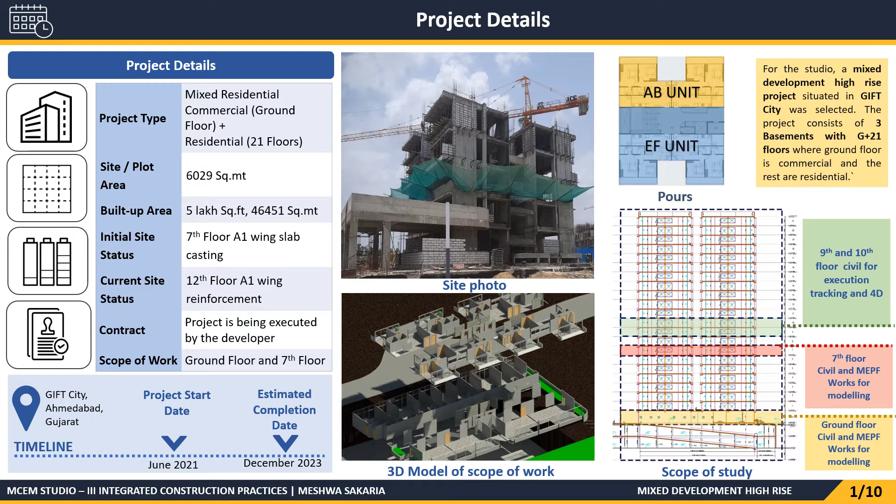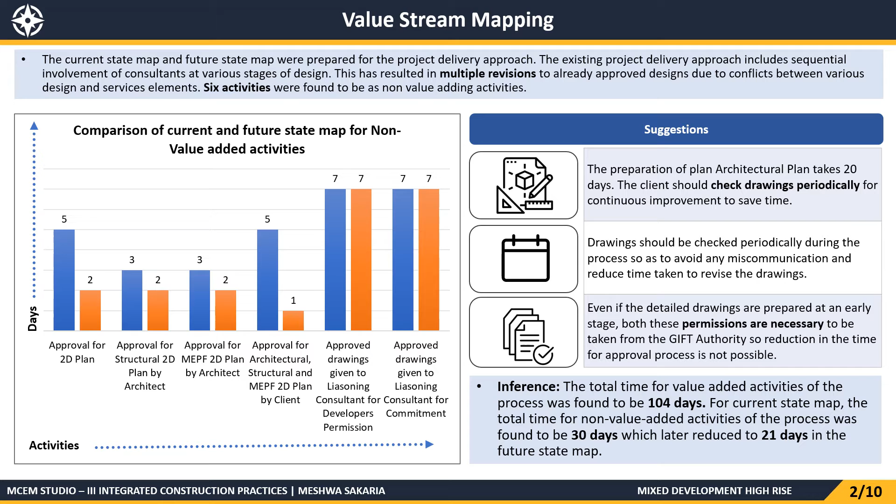6 activities were found to be non-value adding activities, which are shown here in the graph. It also represents the comparison of current and future state map for non-value added activities. The client should check drawings periodically for continuous improvement to save time. Collaborative platforms like Plannerly and BIM 360 should be used.

Thus, the sequential involvement of consultants at various stages of design resulted in multiple revisions. All the value adding and non-value adding activities were identified along with their durations. So for that, we have suggested a revised process to reduce the duration of non-value adding activities.

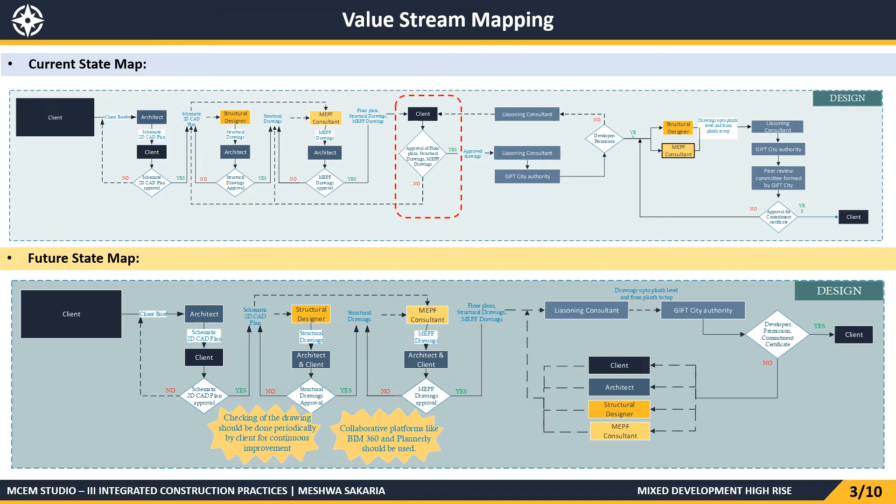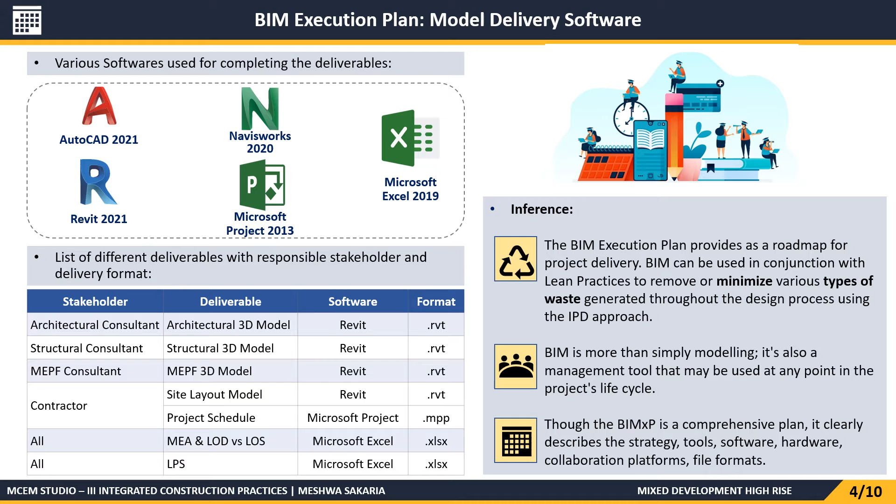So the key learning from BIMxP is that BIM can be used in conjunction with lean practices to remove or minimize various types of waste which are generated throughout the design process using the integrated project delivery approach.

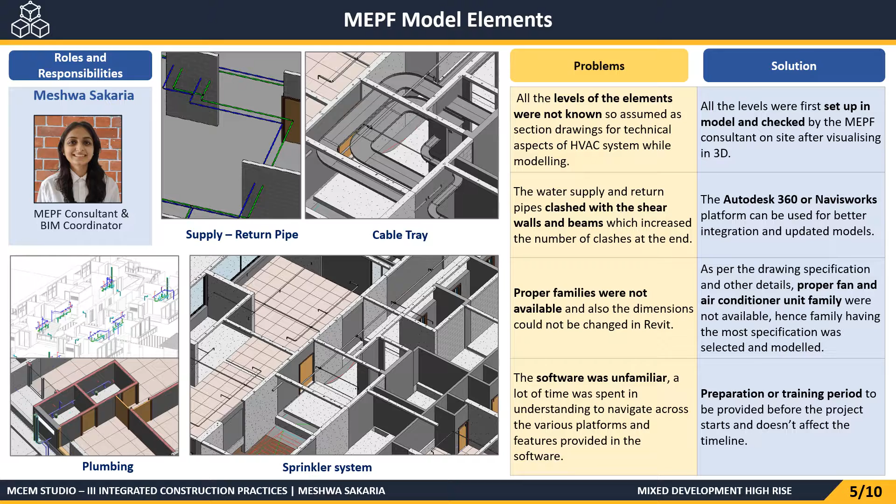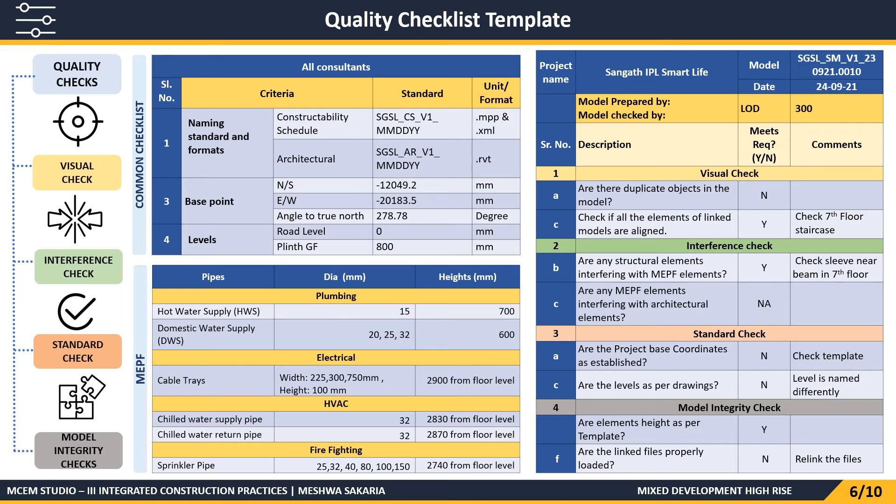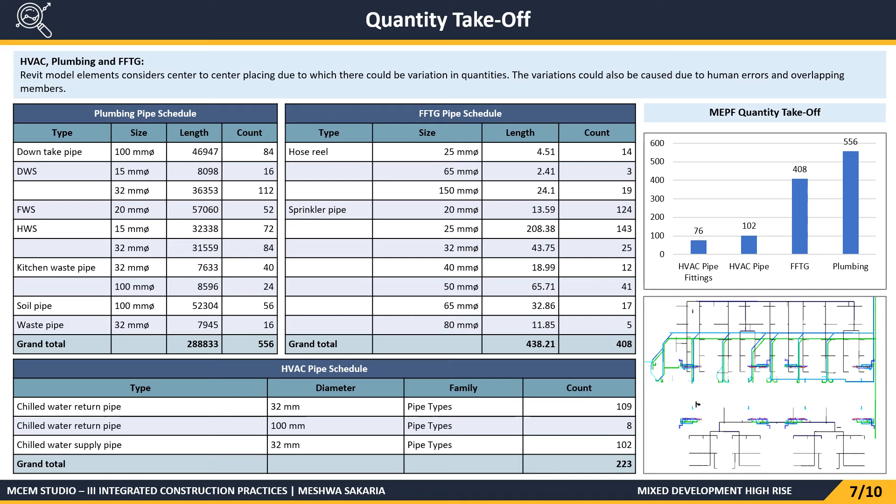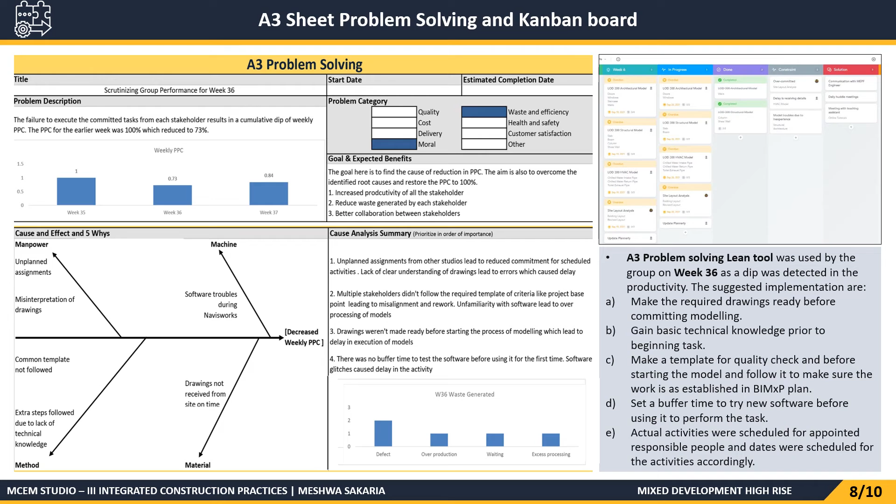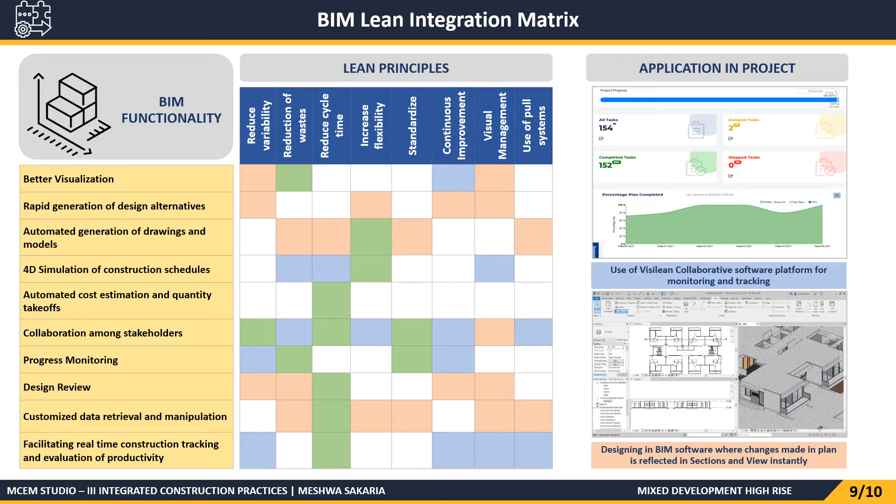My key takeaways as an MEPF consultant are: 3D modeling of MEPF elements was quite easy as Revit has an MEPF layout with all the components. Standard pipe diameters were easily accessible and it was easier to switch pipe materials as per the specifications. Application of quality checks in various softwares helped to identify the clashes at the design stage. Setting up the rules in Solibri helped in ensuring that proper standards were followed.

The tedious and error-prone calculation of quantity from 2D drawings can be optimized by replacing it with customized data retrieval from BIM. Clash detection helped in identifying the interferences and resolving the clashes at design stage before the execution. Also, the Lean tool like A3 problem solving helped in improving the weekly PPC, and delay analysis was done to improve the performance. Thank you.